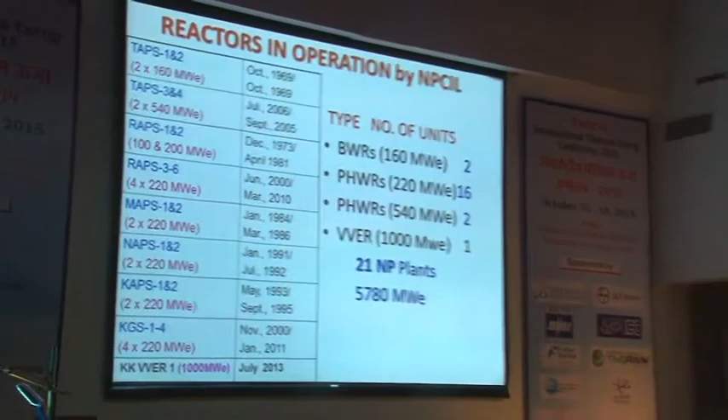Reactors in operation by NPCIL. The Tarapur 1-2 is a BWR and started in 1969. Tarapur 3-4, that is a PHWR of our own design, 2006. This is not in a sequence, but Tarapur, Rajasthan Atomic Station 1-2, Madras Atomic Station 1-2, Narora Atomic Station, Kakrapar, then Tarapur 3-4, KGS. These are the reactors, and then the latest is the VVER 1000, which was started in July 2013, and has completed one cycle. So this is some of the reactors which we are operating.

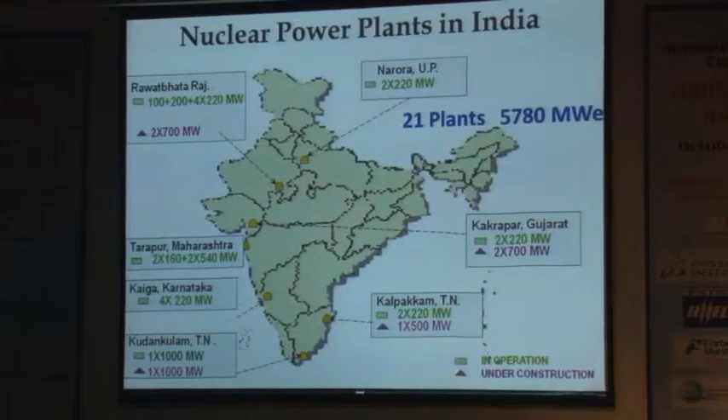Let me tell you that earlier there was a philosophy that from 800 kilometers from the pithead of coal mines, if we should have nuclear power plants so that they become competitive, because either transporting coal or transporting electricity becomes costly. But today we are doing two things. First, the large light water reactors, which have components up to 500 tons, cannot be moved inland. So we will have large LWRs at the coast and our own type of PHWR reactors which can be transported anywhere inside will be inland. So the current our design is of 700 megawatt PHWRs which can be put up anywhere, but the large light water reactors which we are planning to have and having will be on the coast.

Projects under construction, we have today our standard is 700 megawatt. Kakrapar 3-4 and RAP 7-8 are in advanced stages of construction, and there are other reactors which are planned, but these are under advanced stages of construction which can be seen.

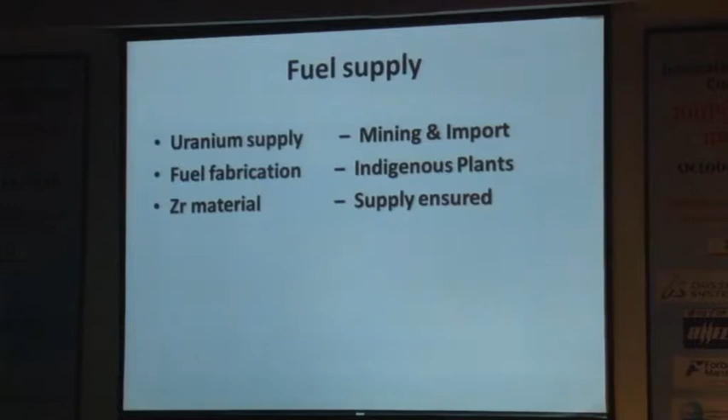The 700 megawatts, there are several of these will be put up. The most recent would be Haryana, Chutka in Madhya Pradesh, Mahi Banswara in Rajasthan. VVER, we have this unit number 2 is under commissioning, and at the same site we have already contracted VVER units 3 and 4, and possibly there will be 5 and 6, and other light water reactors of Jaitapur for EPR and Mithivirdi for AP1000, and another site, Kovvada for GE, are also under consideration.

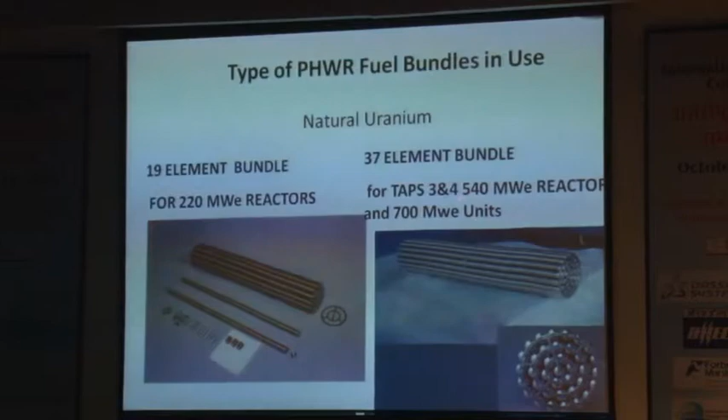Now, on our PHWR fuel, this is the 19 elements fuel for 220 megawatt, our earlier type reactors, and 37 element fuel for Tarapur 3 and 4 and 700 this time. Our fuel looks very different from the typical LWR fuel. It's short.

U-233 production, standard physics. Attributes of thorium, you must have already covered. Variation of eta, the neutrons released, is in this range.

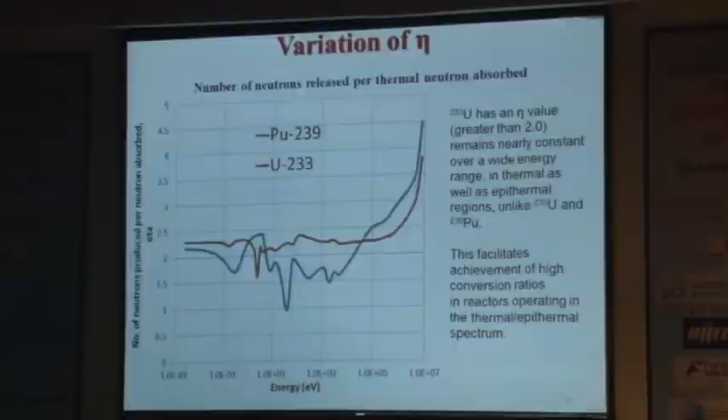Now the issue here is thermal reactors, and we are operating thermal reactors. For fast reactors, there is another corporation called BHAVINI, which has been operating a test reactor for a very long time, and presently the 500 megawatt commercial reactor PFBR is under commissioning. That is a different corporation. Fast breeder reactors are part of the 3-stage program, but in my talk we are representing the thermal range, and even in the thermal range, the U-233 eta is higher in this range.

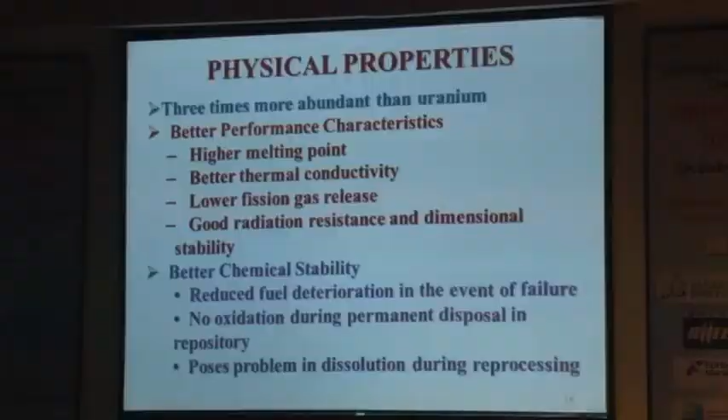Physical properties, I think it's already covered. Physical characteristics: thorium thermal conductivity is higher, thermal expansion smaller, melting point is higher order, fission product release is an order lower, fuel deterioration is slow, and it does not react with water, and so on. So this is a summary.

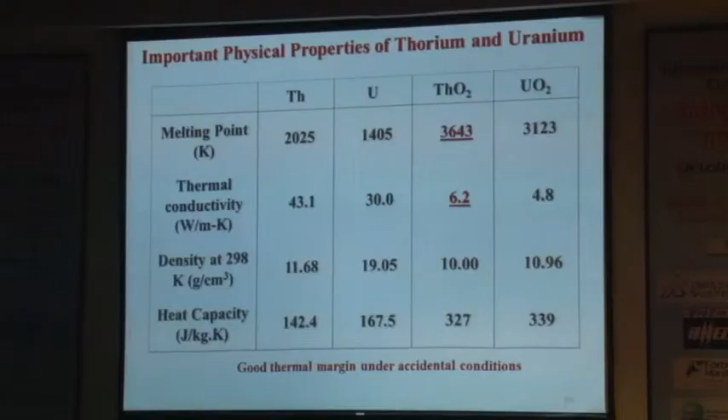Physics and safety considerations: thorium is a neutron absorbing material, causing local neutron flux depression. The magnitude of depression reduces as U-233 is formed. Flux depressions can cause reduction in the worth of reactivity control devices. Criteria for initial fuel loading are arrived such that the required minimum worth is achieved. Some thoria bundles may be shifted from their initial location due to refueling.

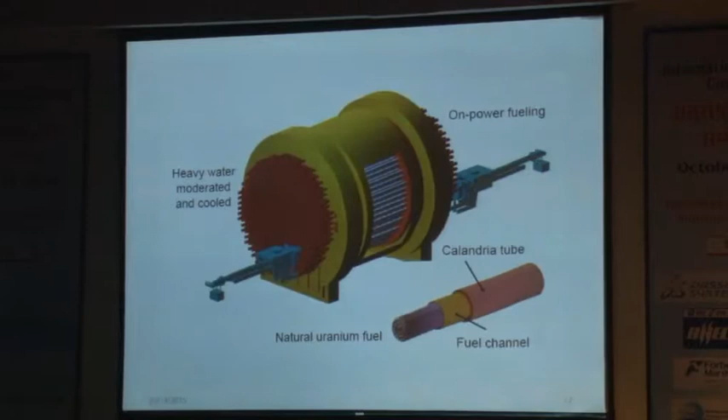This is how our PHWR reactor core looks. This is the calandria and end shield. The coolant tubes are horizontal, and there are 2 fueling machines which keep on power fueling. This is how we go through. This is how the reactor looks, and we load the fuel here. This is an actual photograph of the end view, showing the end fittings and feeders on one side of the reactor in the fueling machine vault.

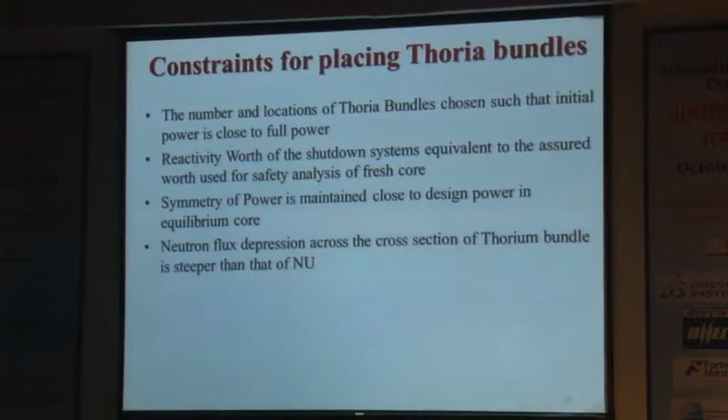Constraints of putting thoria bundles in PHWR reactors: as we said, PHWR is heavy water moderated with natural uranium fuel, and the excess reactivity present in the core is very limited. So the number and locations of thoria bundles are chosen such that initial power is close to full power, the reactivity worth of shutdown systems is equivalent to the assured worth used in safety analysis of a fresh core, symmetry of power is maintained close to design power in the equilibrium core, and the neutron flux depression across the cross section of a thorium bundle is steeper than in natural uranium. This is the thorium bundle, and this causes a flux depression.

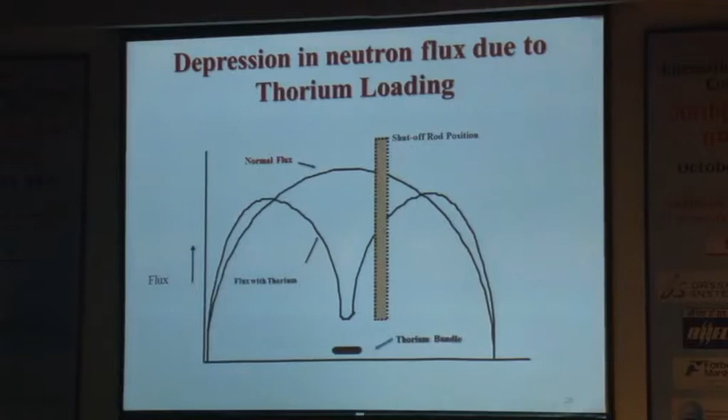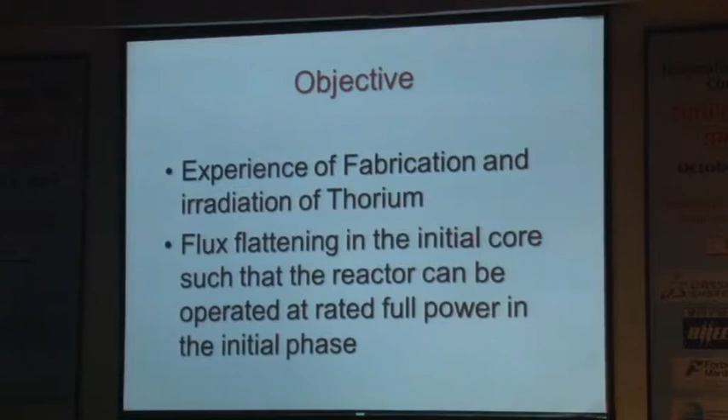Now, our thorium bundle experience - this is our Kaiga plant. Experience includes the objective, fabrication, and irradiation of thorium. We have been doing flux flattening in the initial core for quite some time. This is how the bundle looks. There is a shift in the spacers.

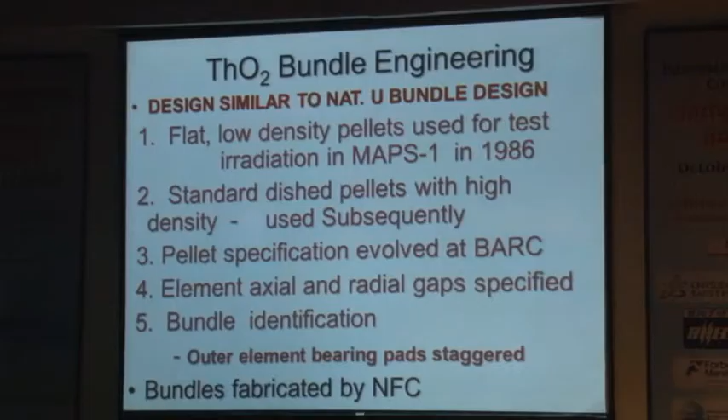Thorium bundle engineering: design similar to natural uranium bundle design. Flat low density pellets were used for tests in the beginning; in MAPS-1 in 1986, standard dished pellets with high density were used subsequently. Pellet specification was evolved at BARC, element axial and radial gap specified, bundle identification done, outer bearing pads were staggered, and bundles were fabricated by Nuclear Fuel Complex. 4 thoria bundles were irradiated in '84 before full scale loading, for flux flattening purposes.

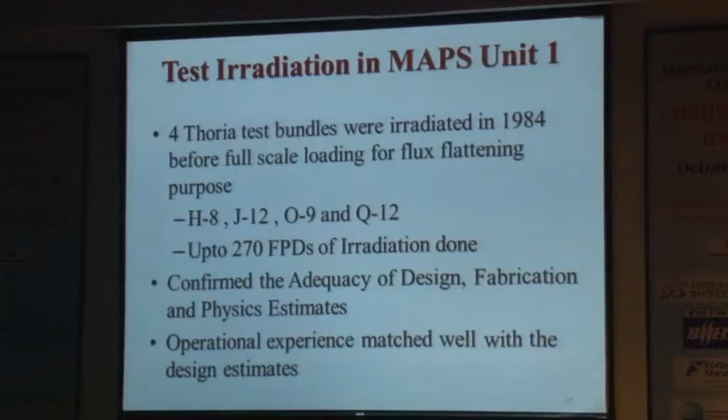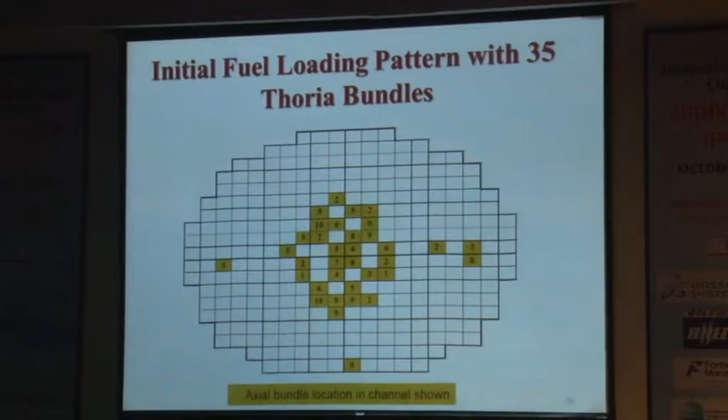These are the channels where it was loaded, with up to 270 full power days of irradiation done, confirming the adequacy of design, fabrication, and physics estimates. Operational experience matched well with design estimates. These were the 35 thoria bundles where we did axial bundle location at the 12 places shown here, totaling 35. Now, initial fuel charge is generally 35 thorium bundles, in the 220 megawatt reactors.

3,637 natural uranium bundles was the standard used in Kakrapar 1, 2, Kaiga 1, 2, and RAPS 3, 4. 18 thorium bundles were used in RAPS 2 after its retubing, following an absence of thorium irradiation in Indian PHWRs. Flux flattening, as already told, has been done in 6 reactors, as shown in the earlier slide. Maximum burn up was 13,000 megawatt day per ton, with 210 bundles irradiated. PIE and chemical spectroscopy analysis confirmed design estimates. A reprocessing program to separate the U-233 is in progress.

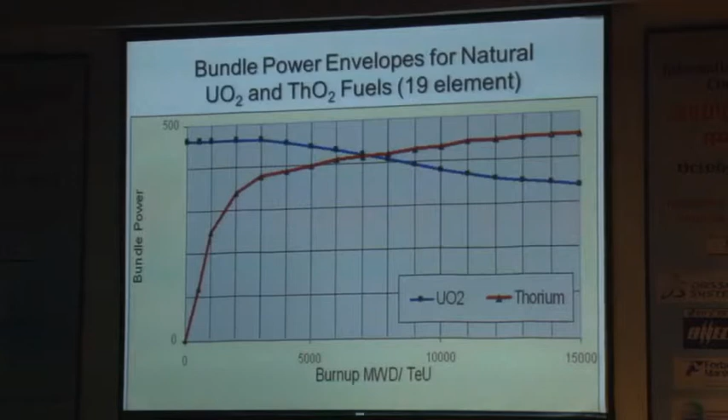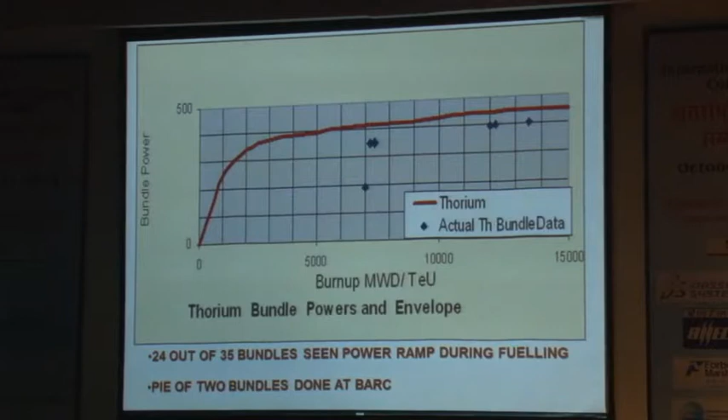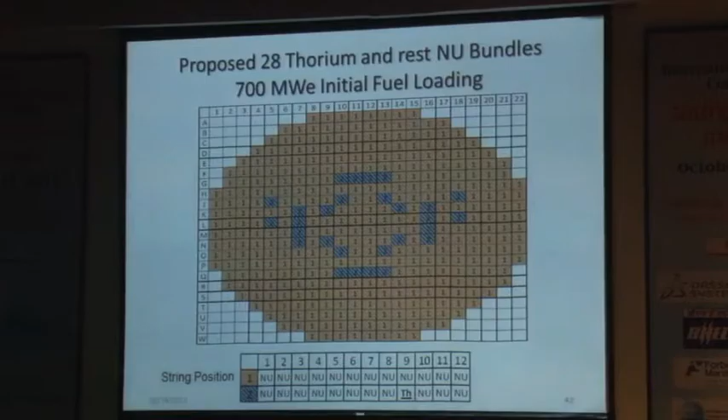This is the thorium and rest NU 700 megawatt which is yet to start. This is the loading position where you are putting them, and this is the string position in this thorium bundle. In this way it is loaded, 12 bundles, and where it is hatched, the 9th bundle is thorium.

Studies for future thorium usage. Irradiate thorium bundles on a regular basis in Indian PHWR core to build up U-233 inventory. There are several ways this can be done. U-233 inventory can be used to power future reactors like AHWR, which is planned to be put up.

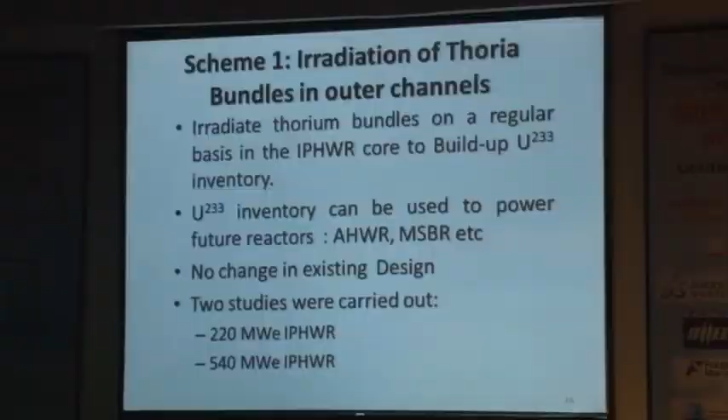No change in existing design. Two studies have been carried out for 220 megawatt and 540. These are at steady state today. What long-term scheme are we going to adopt? It's near, we will start it, but just now we have carried out a lot of studies, and based on these studies we are deciding which scheme to adopt.

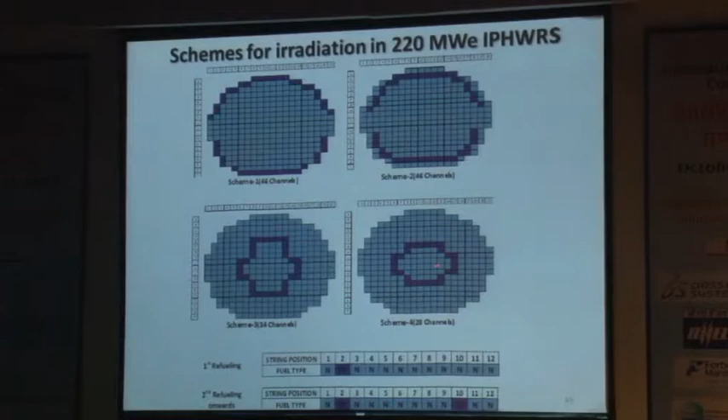Schemes - basically they are the outermost or a little inside, this and this. They are the basic types which are studied. Scheme 1, 2, 3, 4. Now these are the various comparison of all the 4 schemes.

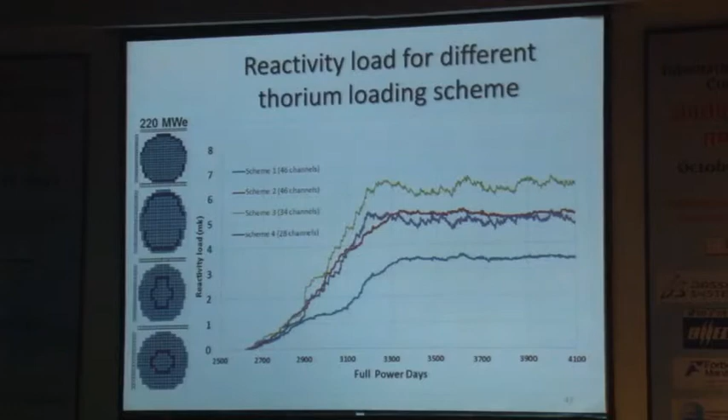Reactivity load for different thorium loading schemes. So scheme 1, 2, 3, 4 - these are the different loads on the reactor which have to be compensated.

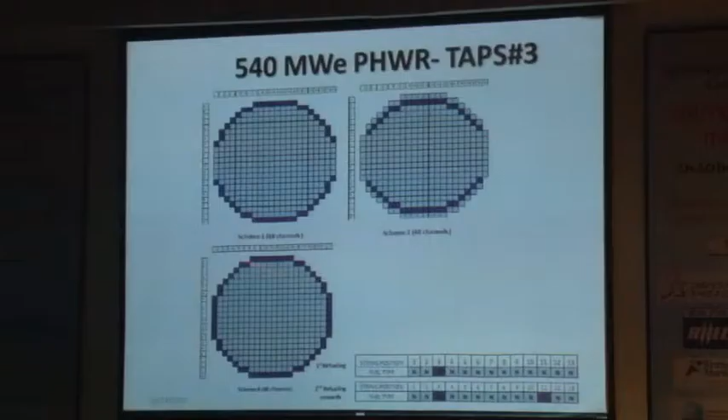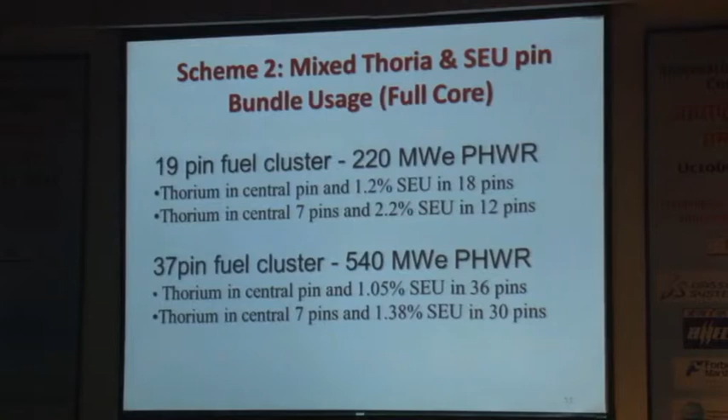Scheme 2, now these are more complex schemes. Mixed thoria and slightly enriched uranium pin bundle use in full core. These have been studied, with thorium in the central pin and 1.2% enriched uranium, and thorium in 7 central pins and 2.2%. These are full core studies, and similarly in 540 megawatt, 1.05 SEU and 1.38.

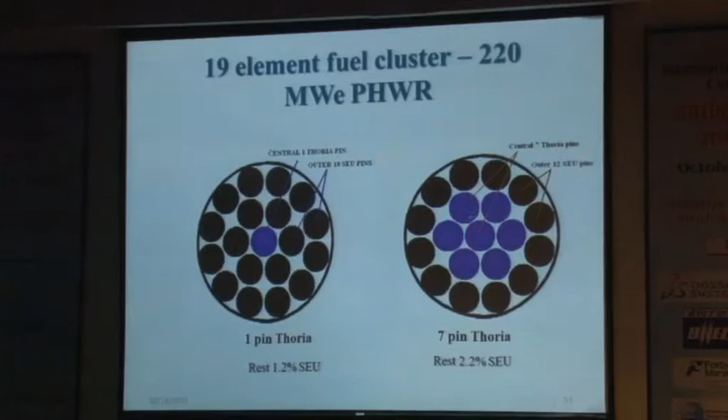These are the types of bundles we are talking about - 7 1-pin and 7-pin thoria bundles. 1-pin thoria, these are annual requirements.

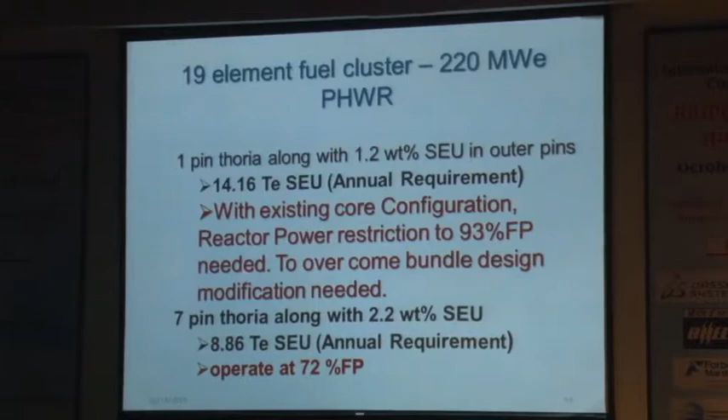I will finish it in 2 minutes. I have until 10:30.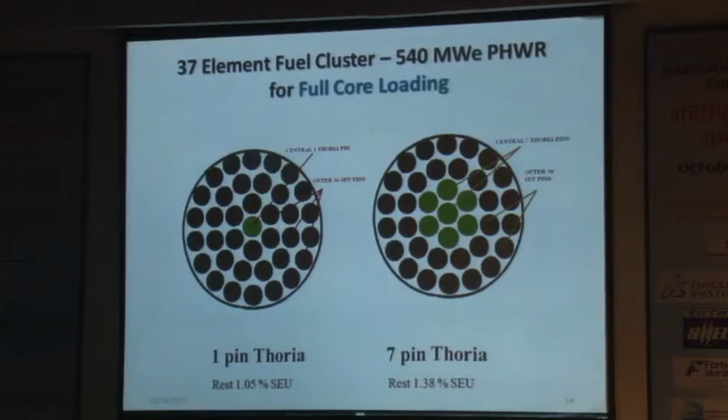37 element, these are the type of bundles. 37 is for 540 and 700, but there are limitations - we can operate only at 95% full power in this case, and in another case again 92% full power.

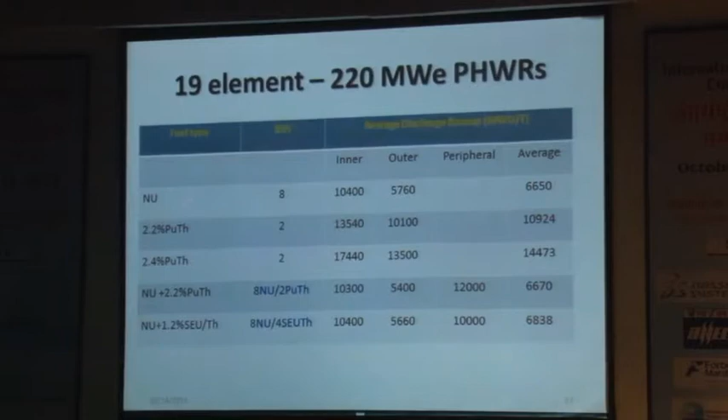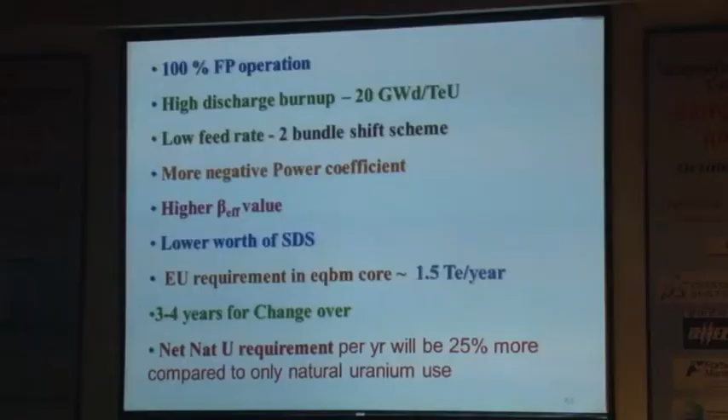Now scheme 5, we are saying that if we even go up to 20% enriched EU, it can be utilized here. This is the mixture, and these are the high enrichment schemes. We have to say that these are proliferation resistant cycles.

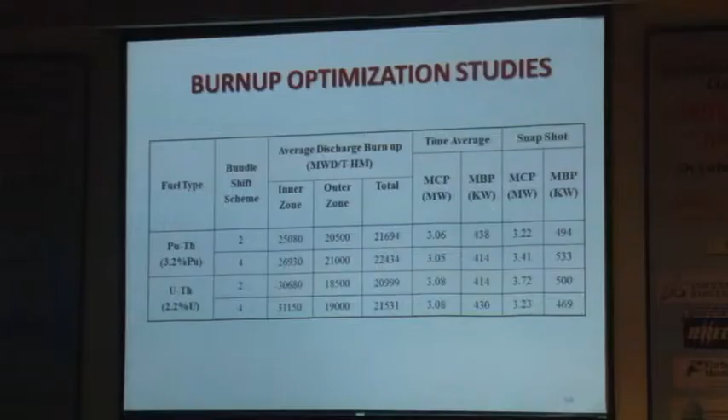Burn up optimization studies have also been done. Shutdown system worth - this shows that they can be operated. Schemes comparison.

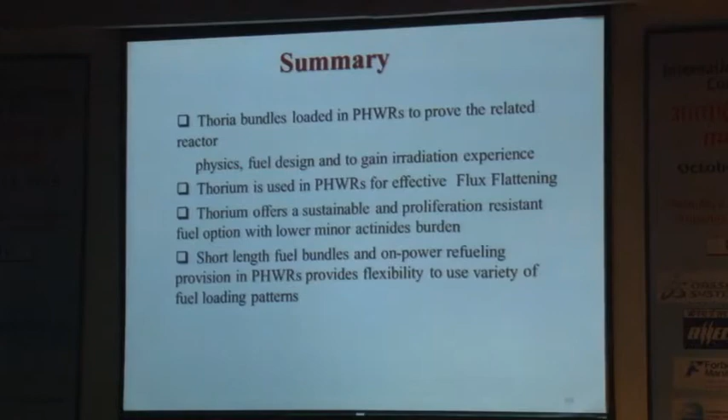Thoria bundles in PHWR to prove the related reactor physics and fuel design, and gain irradiation experience, has already been done. Thorium is used in PHWR for effective flux flattening. Thorium offers a sustainable, proliferation resistant fuel option for lower minor actinide burden. Short length fuel bundles and on-power refueling provision of PHWR provides flexibility to use a variety of fuel loading patterns.